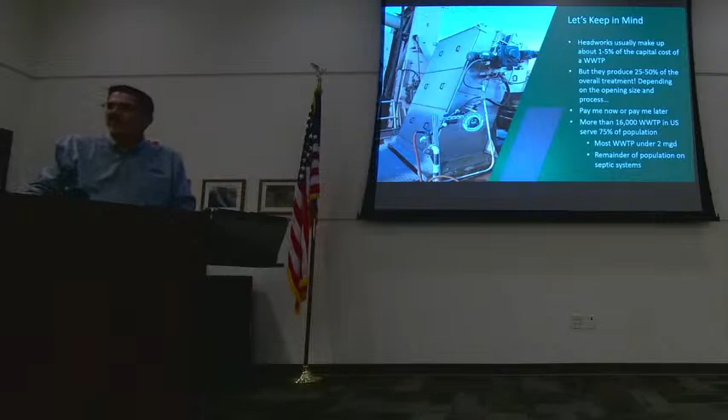So before we really get started, I want to give you a couple things to think about as we go through the presentation, and hopefully these insights will help you put into perspective the things that I'm going to talk about. So when we talk about new wastewater treatment plant projects or wastewater treatment plant upgrades, for example, the capital cost of headworks is between 1% and 5% of a typical budget.

But that headworks is really going to do more than between 25 and 50% of your treatment, depending on what the process is that you're using. And that's a lot.

And I like to say that headworks screening is a pay me now or pay me later proposition. We can take the time and spend the money to take that trash out up front and do it right, or we can spend the next 20 years chasing the trash through the process, right? So that's really something that's important. It's worth spending the time on. So let's remember to keep these things in mind as we go through the rest of the presentation.

Now, when we talk about headworks or wastewater screens, what do we really mean? A screen is simply a barrier with a fixed opening, used to separate one thing from another. In our case, we're separating the liquids from solids, the liquid stuff from the chunky stuff.

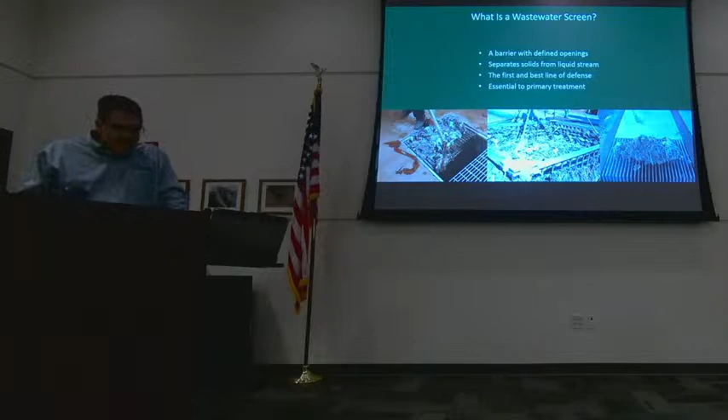Your headworks is the first and really perhaps the most important step in the wastewater treatment process. So great care should be taken when designing and selecting headworks equipment.

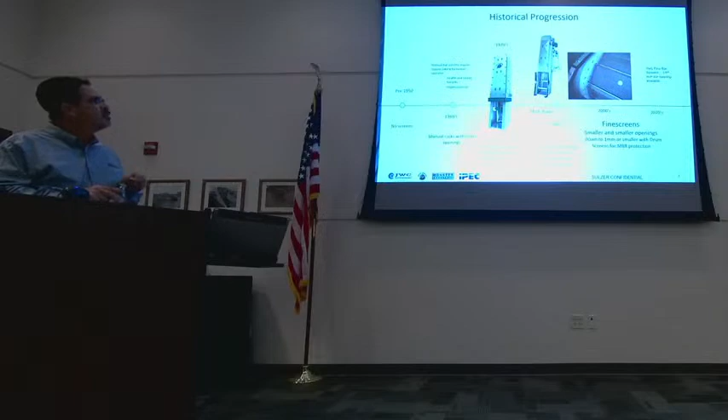Now, historically speaking, we've definitely come a long way. From the earliest days of modern wastewater treatment, there were no screens. Basically the treatment was settling, more settling, some more settling, and then maybe a little disinfection right along the way.

So what is the nature of the material that's being screened out or removed? We generally classify it into two categories: organic and inorganic solids. The organic solids are generally things that can be broken down and are usually helpful as food, for example, for microbes in a biological treatment process.

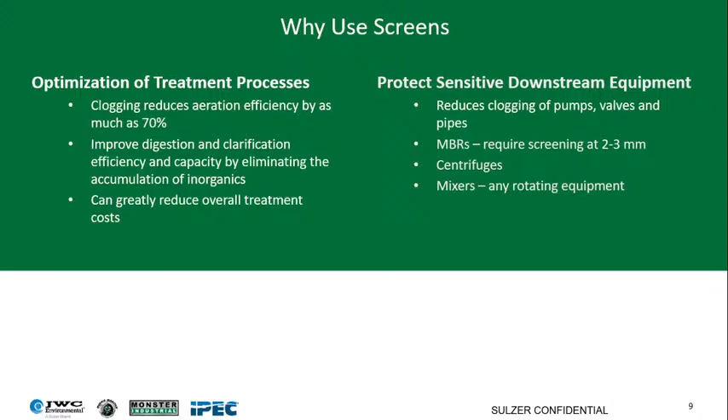Effective screening protects downstream equipment. This is probably the most obvious or visible advantage. We're talking about pumps, MBRs, centrifuges, mixers, any type of rotating equipment that comes into contact with the wastewater benefits from effective screening. We all know when a pump is clogged and has to be deragged, for example. That's a very obvious example.

But definitely the sexiest benefit is that effective headworks saves you money. And who doesn't like to save money? Headworks saves you money by reducing overall treatment cost, maintaining high efficiency and low maintenance costs. If that equipment is working well, we can spend a lot more time doing more productive things than worrying about deragging pumps, for example.

So effective headworks screening directly affects the bottom line. Just by reducing the time spent maintaining ragged-up equipment, that alone can justify the expense of better screens. But that's not all. Maintaining operational efficiency in aeration basins or digesters, for example, drives down the ultimate cost of treatment, so the cost per gallon of wastewater to treat goes down.

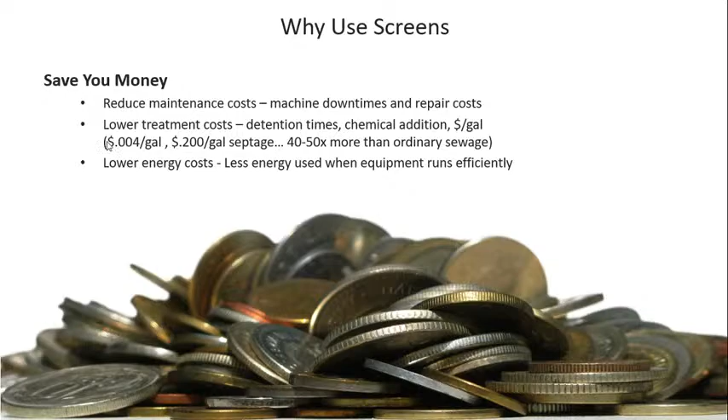Lastly, there's an important income stream that municipalities use around recycled biosolids—things like cogeneration, pelletizing, land application, and so on. These uses all require the final product, the dried sludge, to be very clean, otherwise it's unusable. So let's keep that in mind too.

Here's a quick look at what we mean by the results of poor headworks screening, especially as it relates to protecting downstream equipment. This is a problem a lot of you are familiar with: clogged up pumps, of every kind. This is a dirty job—we spend too much time and money dealing with it. And the problem isn't going away; it's probably getting worse, especially with the advent of flushable or non-flushable wipes.

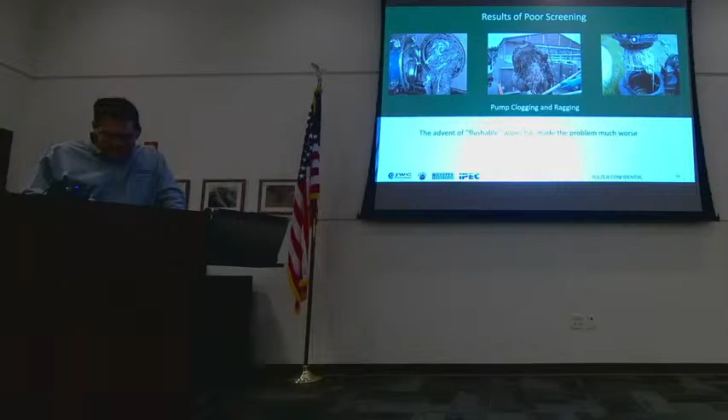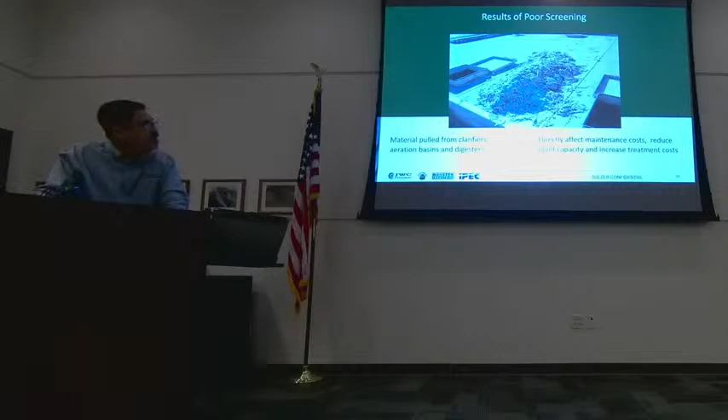Again, here we see a similar problem. Sitting on the deck are rags, or witch's hair, or many other names we call it, that's been removed from an aeration basin or an MBR chamber. If these came out of an MBR chamber, it's a very serious problem, because these rags hanging all over the membranes cause a lot of damage, and that issue can become very expensive in a short period of time.

Now that we've seen why it's important to screen, let's look at a few of the more common or important technologies available. Today we'll be looking at bar screens, perforated plate fine screens, band screens, and internally fed drums. But it's also important to note there are many other types as well.

Spiral screens, step screens—which are a type of bar screen—grab screens and trash racks for very large flows, for example in flood control, in-channel drum screens, semi-permanent baskets, element types, and there are even more types we just don't have time to talk about.

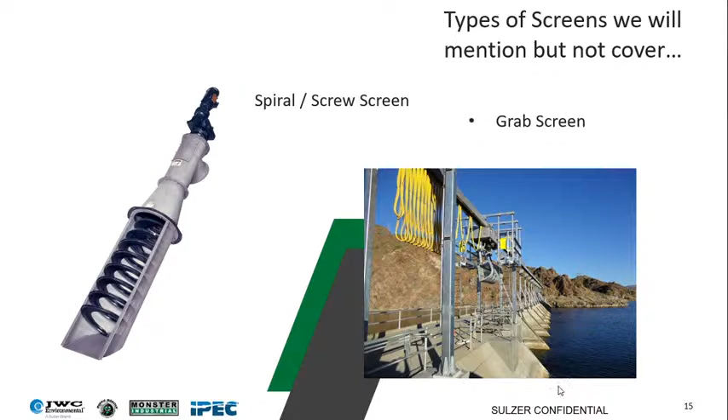Before we go on, I want to show you two different types of screens that I'll mention in passing but won't discuss much today, just so you have a frame of reference when you see them. On the left is a spiral or screw screen—many of you are familiar with this: a permanent semi-round basket, perforated plate cleaned with a spiral with a nylon brush on the edges. On the right is a grab screen, the Bosker type. We won't discuss these in detail today, but I wanted you to have that frame of reference.

Let's start with bar screens. Again, there are many types: climber screens, which have a single rake arm, and multiple rake screens that a lot of you are familiar with—these have multiple rakes on a continuous chain, cleaning the bar rack continuously as the chains rotate. Step screens are thin lamella plates alongside each other.

Trash racks have flexible rake assemblies for raw water. They can be quite large, but are mostly intended for raw water—you see these in flood control applications, for example. Catenary screens are a very early type of multi-rake design.

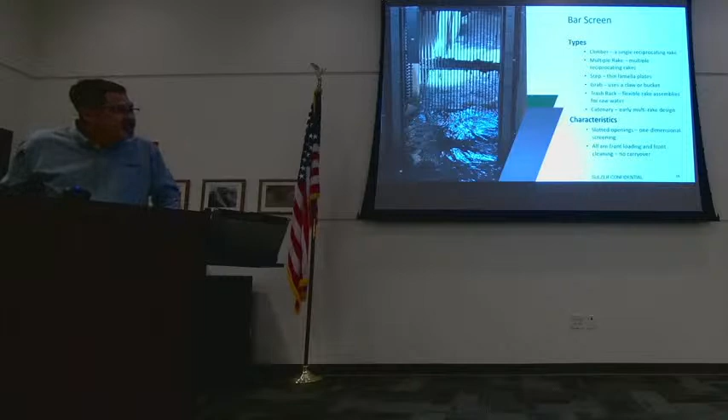These are all characterized by slotted openings—one-dimensional screening. That slotted opening is as deep as the water column. They're also all front loading and front cleaning, meaning there's no opportunity for screenings carryover. All of the trash is captured on the front of those bars and stays there—that's why it's front cleaning and front loading, with no carryover.

Now, bar screens are employed throughout the wastewater treatment system. You'll see them in collection systems, at pump stations, in the headworks of course, and they have industrial applications as well as in septage receiving.

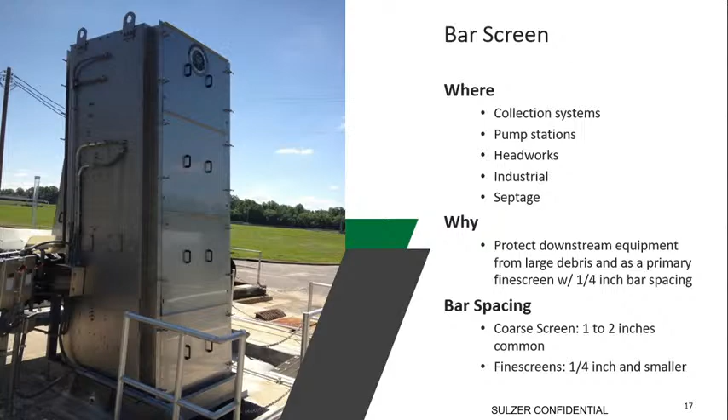Now, why is this piece of equipment helpful? It's mostly used to protect downstream equipment from large debris. This is a coarse screen. When used as a primary headworks screen, the bar spacing is typically 1/4 inch, and that's actually considered a fine screen today. But where you'll see it most often is with large bar spacing, greater than 1/4 inch, maybe 1/2 to 2 inches, in front of large pumps to protect those pumps from damage.

So as we go through the terminology, fine screens are typically today considered anything with a 1/4 inch opening or smaller.

Now this type of equipment does have a lot of benefits as well. It is by far the most common screen employed today. In every part of the country, it's the most ubiquitous headworks screen that we have. It's quick and easy to install, and relatively inexpensive compared to other technologies we'll talk about, and it's very versatile in that it can be fit into virtually any application.

Most all of these in-channel screens that we'll discuss are able to be delivered in sections, so that allows us to use low overhead space, etc.

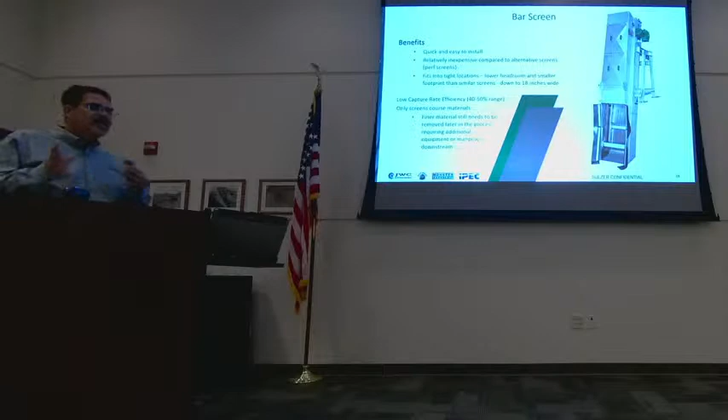Now the downside is that this equipment has very low capture rate efficiency. All the types of bar screens that I mentioned have capture rate efficiency in that 40 to 50% range. Now when I quote you capture rate efficiency numbers, we're talking about everything that comes into a headworks.

So now let's look at the next type. We'll talk about the perforated plate fine screen or mesh screens as well. There are a lot of different types. That spiral and screw screen I showed you a picture of, that's a perforated plate. It can be considered a fine screen with 1/4 inch perforated plate.

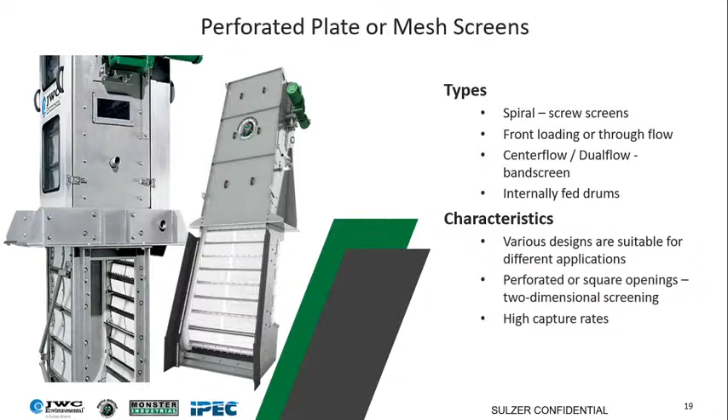There are front loading and through flow fine screens as well. There's the center flow and dual flow screens - the dual flow especially are used for raw water intake. These can be very large equipment, up to 100 MGD in a single unit.

And of course, internally fed drum screens also employ a perforated or mesh screening media. Now this type of equipment is characterized by high capture rate efficiency. Whereas the bar screens are low capture rate efficiency in that 40 to 50% range, the different designs of perforated and mesh screens can have capture rate efficiencies from 70 to 90% or more.

And that perforated or square opening allows us to screen in 2 dimensions. Whereas the bar screen is screening in 1 dimension, because we're using perforated plate or mesh, we're screening in 2 dimensions, and this is the reason we can get such high capture rate efficiencies.

Now, since I've told you about 1-dimensional and 2-dimensional screening, let me try to illustrate what we're talking about. On the left-hand side, you see a bar screen with a 1/4 inch opening - it's a single slot as deep as the water column. Why does it have such low capture rate efficiency? Well, you can imagine that if you're a credit card or a drinking straw or a piece of paper, you can squeeze in between those two bars and pass through into the wastewater treatment plant.

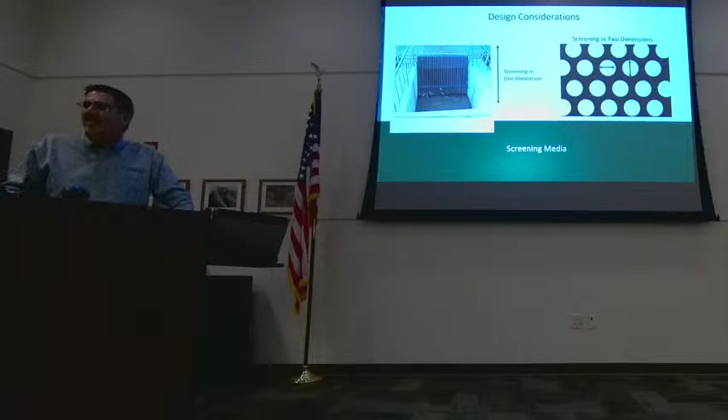There's also a difference between bypass and carryover. Since the capture rate efficiency is not 100%, there are things that are going to get through a screen. That is considered screenings bypass - it either circumvents the barrier or passes through the barrier in some way.

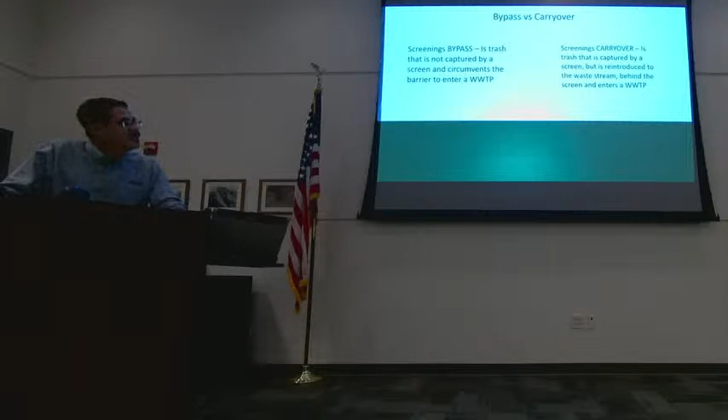Carryover is different. This is trash that is actually captured on the screen, but then reintroduced into the waste stream in some way. So on a bar screen, for example, we carry the trash up on the face of the screen, and then we move it over to the backside because we discharge the screenings on the backside. Now if we don't get all that trash off there effectively, it's going to drop into the waste stream behind the screen and enter the plant.

So that's called carryover, and we'll see that sometimes it's important or not important, depending on what the treatment process is. In a standard biological or aeration treatment, a little bit of trash maybe isn't so important. In an MBR or another fancy treatment process, a little bit of trash can do a lot of damage. So there's certain equipment that's appropriate for one application and not for another.

Do you have data here in Central Illinois on what type of equipment is in the downstream, or is it all over the place? We're getting a question here in the room. Yes, all over the place. On that basis, the frontline defense or headworks screen can be designed around what your downstream process is capable of handling.

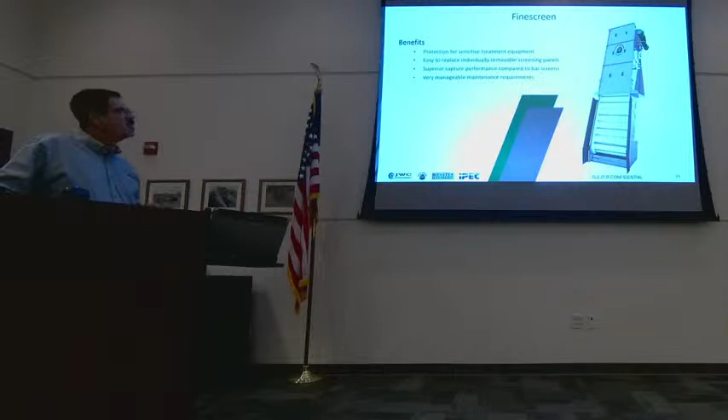We can use perforated plate on this type of equipment, down to 2 millimeter, even 1 millimeter - you'll see 1, 2, or 3 millimeter openings for very sensitive processes. A typical headworks fine screen will have 6 millimeter or 1/4 inch openings. We can do stainless steel or UHMW panels. It is front loading, but different from the bar screen, it is rear discharging. That's where the possibility for carryover exists, and for that reason this particular equipment is not recommended in front of an MBR.

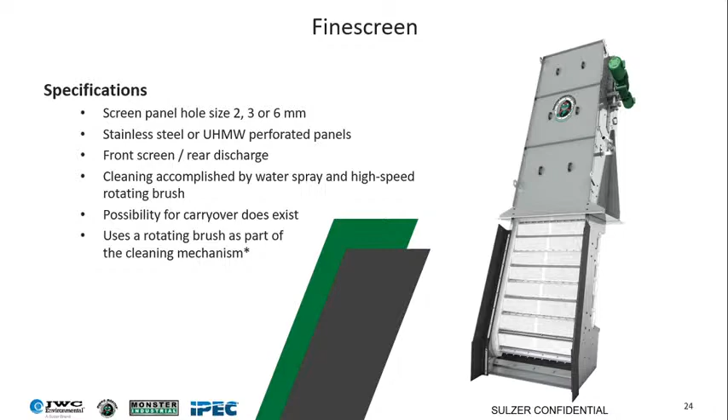We'll see why, or what's the difference between this one and a band screen, which is recommended in front of an MBR. And I told you it uses that brush as part of the cleaning mechanism - I have an asterisk there because the cleaning brush on this type of equipment is a point of contention. There are a lot of operators and owners for whom that brush is a problem. It does have to be maintained, replaced periodically, and part of maintaining the brush means cleaning it - and it is covered in poop. It's a dirty job, nobody wants to do it.

So there is an alternative. JWC does have a through-flow fine screen without a brush - we call it a brushless fine screen. Now because that brush is doing a lot of cleaning, we have to replace that cleaning with something else, and that something else is more water. So we add a second spray bar, we throw more water at it, at higher pressure if possible, but we remove the brush. So this option is not for everyone - you have to understand you're going to be consuming a whole lot more water, but on the other hand, you're getting rid of the brush. So that option does exist.

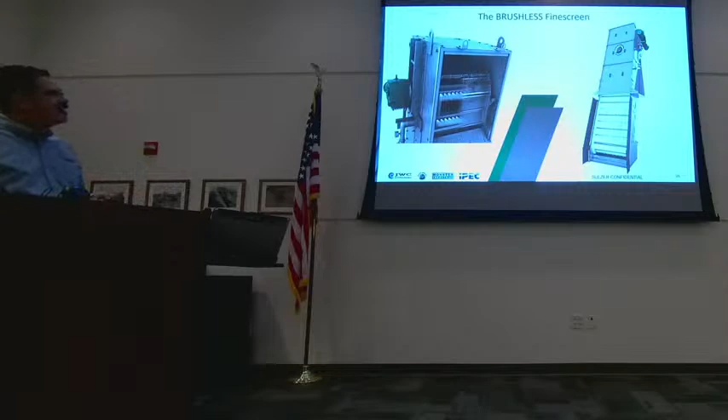Here we just see some nice installation photos. Similar to the bar screen, the through-flow fine screen is pretty versatile. We can make them as narrow as 18 inches, as tall as 50 feet, so they're quite versatile as well.

So what are those windows? Go back to the screen. Those handles you see, on the front, those are front covers. On the upper left you see the UHMW panels version, and on the upper right is the stainless steel panels version that I told you we can do either.

A good question there is, what's the difference? Well, stainless steel is obviously more robust than the UHMW. So if this is being employed as a primary headworks screen, you can expect sometimes to have large impacts, rocks or engine blocks, dead bodies, things like that. So the UHMW panel is a little bit less robust.

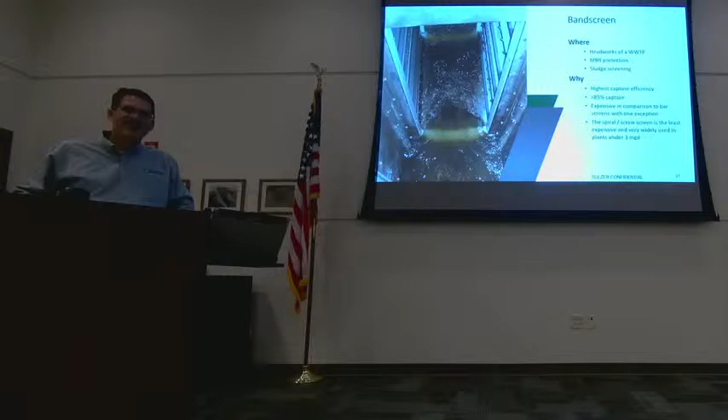And you talk to a maintenance guy, and he said, oh my God, I didn't even realize these things needed to be done. I wish I could record this. I honestly feel every time these guys come in, you better do all your recording so you can check the brushes, check everything. That's actual hands-on training with your maintenance guy, and that's priceless. How many people get that opportunity where a manufacturer comes in and rebuilds it?

You're paying 15, 20 grand. If you want to take full advantage of it, if I were head of the department, I'd put a drone or a recording up there, continuous recording. And if I want to stream it on Facebook, so be it. That's a great point, Ram. That's a really, really good point.

So oftentimes when we sell a new Headworks screen, we like to offer the owner a maintenance program. It can be as simple as 2 years or 3 years, where I'm going to come out twice a year and inspect the equipment.

And every single time, the biggest part of that is training. This is an investment, an insurance policy where we're going to do some continuous training for your operators. Twice a year we come out, hopefully there's nothing to do, but we'll show you how to maintain the brush. So it's interesting, when we were looking at the through-flow fine screen with the rotating brush on the back side, we'll get a call periodically saying, hey, that fine screen you showed me is a piece of crap, doesn't work.

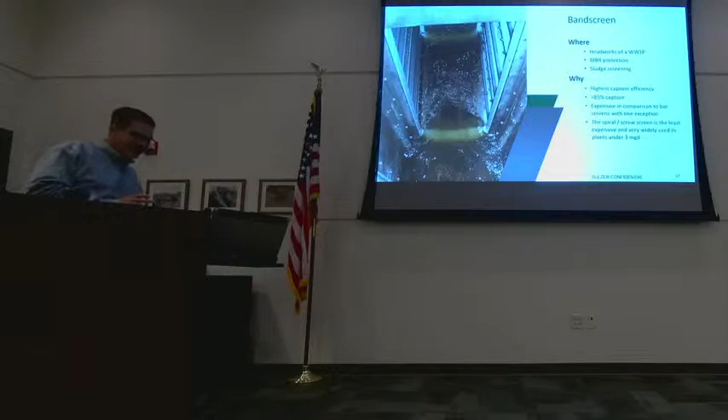So the band screen, again, is a fine screen turned on its side. Here, instead of the liquid impacting the screen on its face, it goes inside the machine, and then the trash is being collected on the inside. So this type of equipment is recommended in front of an MBR because there is no possibility for screenings carryover. All of the trash is collected on the inside of the machine, so we call that the dirty side of the panel. And the clean side of the panel is on the outside of the machine, and the two never meet.

So that's what, because of that, and because of the sealing methods that we use, this equipment has even higher capture rate efficiency than the through-flow fine screen, greater than 85%. So now we're really talking about making some impact. Now, it is a bit more expensive. So in terms of capital expenditure, you go bar screen, through-flow fine screen, band screen. Every time we talk about higher expense or higher capture rate efficiency, remember we're also talking about better performance. And we also see a little bit higher head loss again.

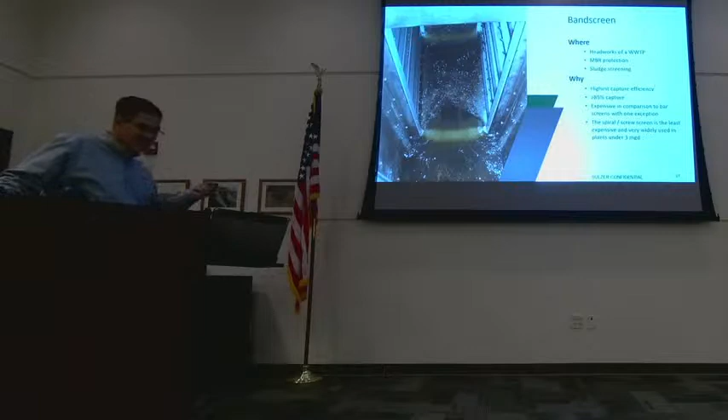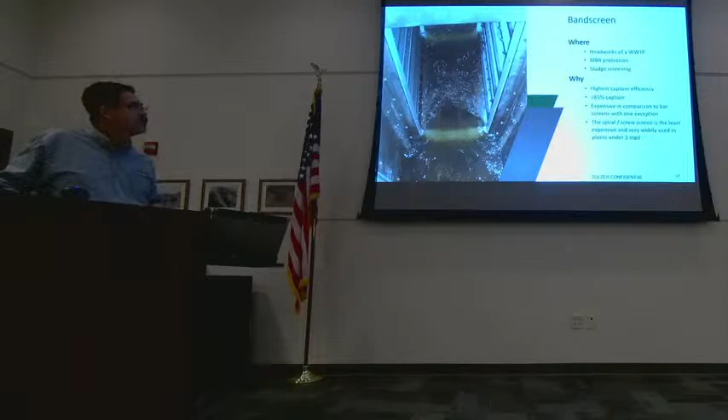So here on the left-hand side, now we can see what we were talking about before. It's easier to see how the water enters that screen, enters the throat of the screen, then makes hard right turns as it hits the back, and then is filtered through those panels on the inside. So this is the highest capture rate efficiency of any of the in-channel screens. All of the screens are fully enclosed to reduce odors. Similar to the through-flow fine screen, all of this band has individually replaceable panels.

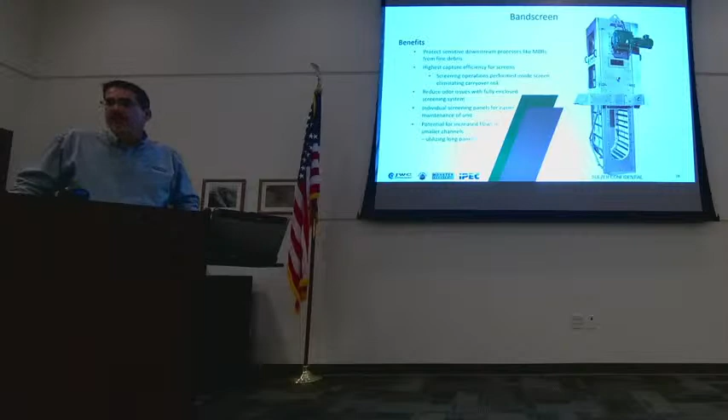Now, the most unique thing about the band screen is that you have the opportunity to have panels which are longer than the channel is wide. So a lot of times, clients will want to get more flow through their plant, but they will also want to screen it better. Clients are usually on a continuum with regard to screening. 30 years ago, they might not have had a screen at all, and they bought a bar screen with a 1/2-inch opening and were super happy with it. Oh my God, this is amazing, we didn't realize how much trash we could collect. And they had that screen for 15 years, and then suddenly they weren't happy with that anymore. So they went to a 1/4-inch opening.

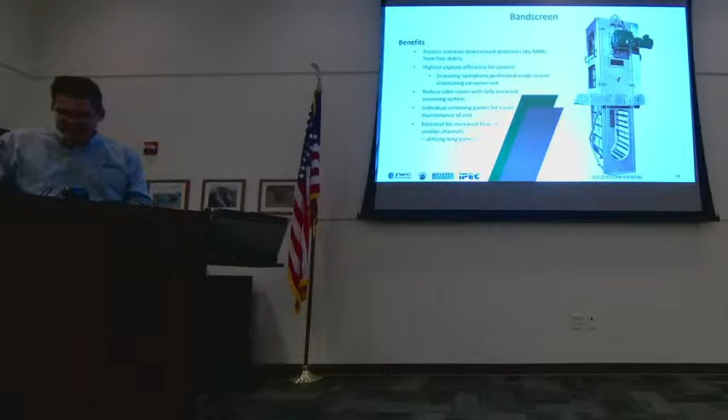And now 30 years down the line, as the client progresses on that continuum, his tolerance for trash keeps going down. We got to take out more and more until we get to the perforated plate, and then he wants to start putting more flow through it. Usually the answer is no, because we're limited to the width of the channel. But with a band screen, we can make the panels longer. We're not limited to the length of the panel by the width of the channel. Panels can be longer. So in a 4-foot channel, I can get a 6-foot panel, and I've got 2 of them, so I'm adding a lot more open area to that space. And this is your best chance for getting more flow through an existing channel is in a band screen. But remember, it's expensive. It's the most expensive of the in-channel types.

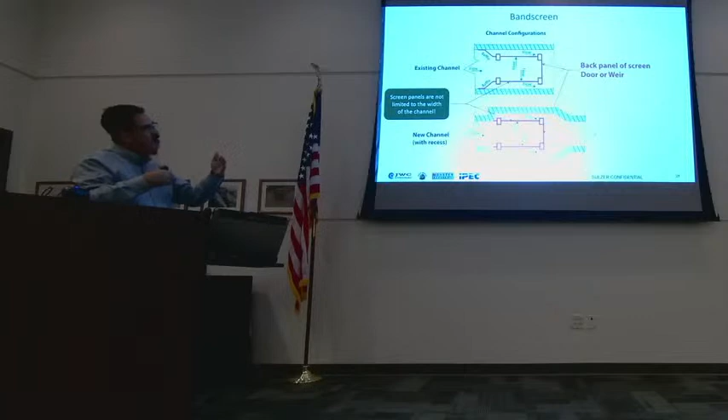So this kind of shows you what I'm talking about. The red lines are where the band screen would be installed. On the top part there, we can see an existing channel. I can make those panels longer, but you see the arrows that show you how the flow goes in, goes out the sides, and then around the back. When we have new construction, we can recess that channel, we can bump it out a little bit. So it's a narrow approach, a bump out for where the screen sits, and then narrow again in the back.

So as I told you, this is recommended in front of MBRs. We can go down to 1 millimeter to 6 millimeter perforations. Also UHMW or stainless steel. No possibility of carryover with this equipment. Very high capture rate efficiency compared to other in-channel screens.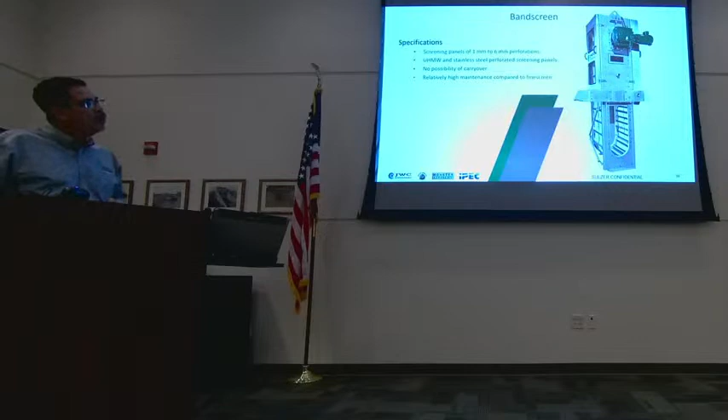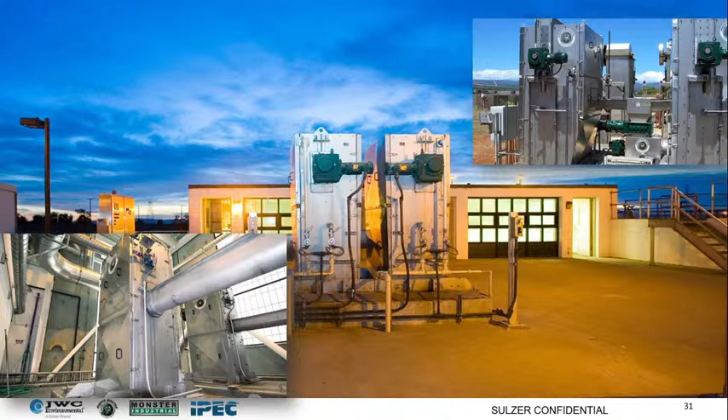Now sometimes I'm asked, well, how does the trash get out of there? Because the trash is collected on the inside. Over there on the right-hand side of that picture, you see there's a square opening under the drive system, so that's the trough where that trash is collected. So as the trash is collected on the inside of the band, it's carried to the top of the screen where we wash it, and it falls into that trough, and then that trough brings it out of the machine. We can do it in different ways, as a sluice way, or a shaftless conveyor, or even a washer compactor, so we can even put a washer compactor inside of the head of the screen to capture those solids as well.

So the last ultrafine or perforated or mesh screen we're going to discuss today is the internally fed drum. These are employed in primary headworks, very good for MBR protection for the same reasons as the band screen.

As a sludge screen, septage receiving, in all kinds of industrial applications, and a very wide range of flows. The largest internally fed drum screen we manufacture can manage 12 to 14 MGD in a single unit. Very large drums, there's a 60-inch diameter drum by 12 feet long. So a large drum.

Definitely by far the highest capture rate efficiency of any of the equipment we've discussed so far today, 90% or greater. The reason for that is there's no sealing system involved in a drum screen. Everything that enters a drum has to be screened or come out the other end. There's no place for it to go. So the capture rate efficiency is very high, because there's no sealing systems to maintain.

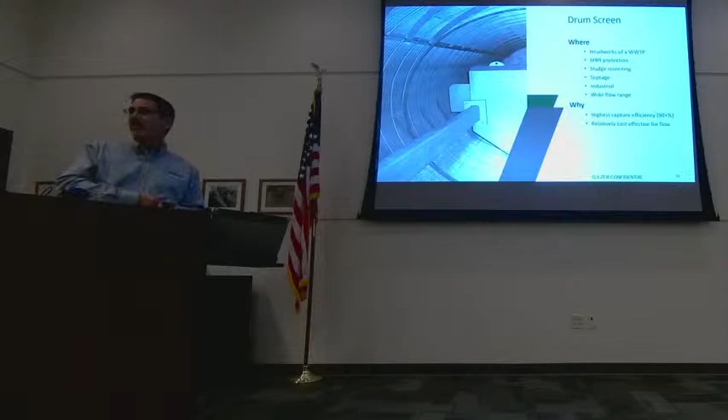Very bad also, right? So as a designer, an operator or a consultant, you have to decide what's preferable. Do I want to risk an overflow? Do I mitigate it by building containment? Or do I want to risk potentially fouling a membrane unless these seals are properly maintained? So we talk about the give and take of that kind of design consideration.

So here you go, between 12 and 14 MGD in a single unit, but they can also get kind of small, we'll make as small as an 18-inch diameter drum. It does require pumped flow, although it's also possible to feed them by gravity. But typically you'll see these in a pumped flow application, elevated headworks, or in an industrial application.

Now you say, well, that sounds great, much better than a band screen, and it can be. But the capital expenditure, there's a break-even point. Very, very large screens, very, very large applications.

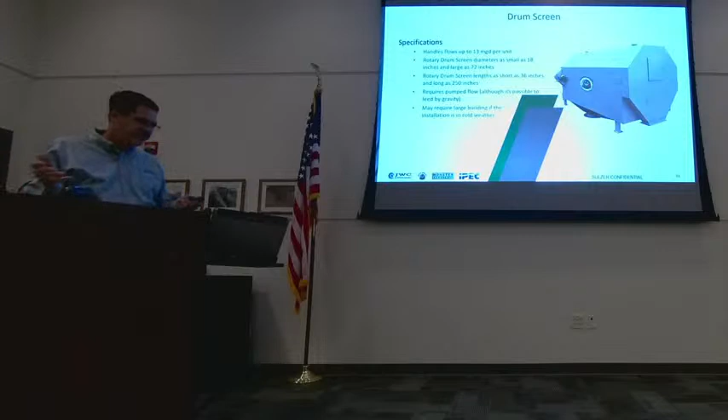You imagine some of the wastewater treatment plants in the city of Chicago, a 300 million gallon a day wastewater treatment plant. If we were going to do it with drum screens, let's say 10 average, that's 10 for 100, 200 is 20, 300 is 30 screens. That's untenable, and especially in Chicago they would have to be inside a building. So the infrastructure becomes too great.

So it just becomes cost effective, you must use channel screens. There's kind of a break-even point in that perspective. When you get very, very large applications, it has to go in channel. Smaller applications, if it's pump flow especially, drums are the way to go.

So super high capture rate efficiency, you can have mesh lined drums that are used for thickening sludge, where we're talking about thousandths of an inch. They're designed for pump flow, fully enclosed screens, again no carryover, so there's a lot of pluses. I can show, on the way here talking with Ram, a lot of the industrial applications.

So these screens are employed in all kinds of applications. We see screening algae, whole chickens, feathers, and all kinds of stuff, fish guts. It's an amazing array of applications for the drums in industrial applications.

Now, here quickly, if you hadn't been exposed to drum screens before in the past, exactly how does that operate.

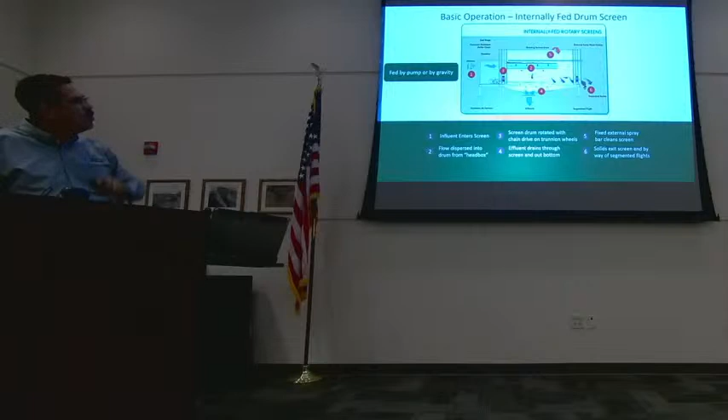The water enters the drum from the left-hand side. It might be difficult to read there, but that influent enters the screen at the red circle number 1, and then it spills out onto the drum over the head box there, and then the effluent, screened effluent drains out the bottom, and the solids that are collected on the drum are augured out to the discharge end down there at the red ball number 6.

How many application between in a wastewater treatment? You can repeat the question. How many application in a wastewater treatment plant do you see with the drum screen versus the standard channel?

So the question was, how often do you see drum screens applied versus channel screens? Really, it's kind of regionally dependent. In areas where there is very flat areas, like Florida or Texas, places like that, and deserts that are not mountainous, then you'll see more drum screens, because everything's pumped. Everything has to be pumped because there's no gradient to flow by gravity. So those places you'll see more, higher percentage.

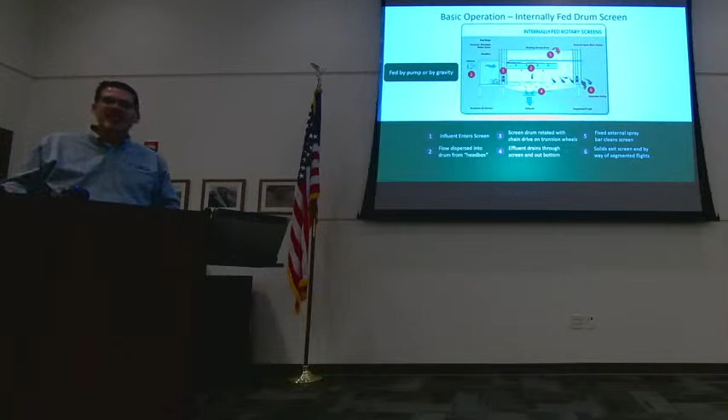But even in those areas, you still see more channel screens than you do drums. I think it's just because the consultants are more used to designing in-channel or channels leading into a wastewater treatment plant than they are doing the other way. So I think it's kind of still, I'm not going to say it's emerging technology because it's not. It's just that consultants tend to do what they know, and what they know is to deliver wastewater in open channels to a wastewater treatment plant.

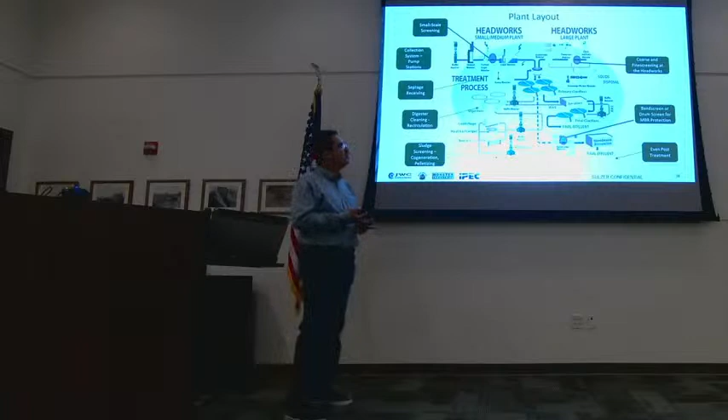So we talked about small scale screening, with those screw screens and auger screens, large headworks with the in-channel screens as well as drums. But then we talked about pump stations and collection systems. We talked briefly, we mentioned septage receiving stations. We mentioned sludge screening. So when you're going to have cogeneration or pelletizing or things like that, that sludge has to be really clean. So you'll see rescreening sludge.

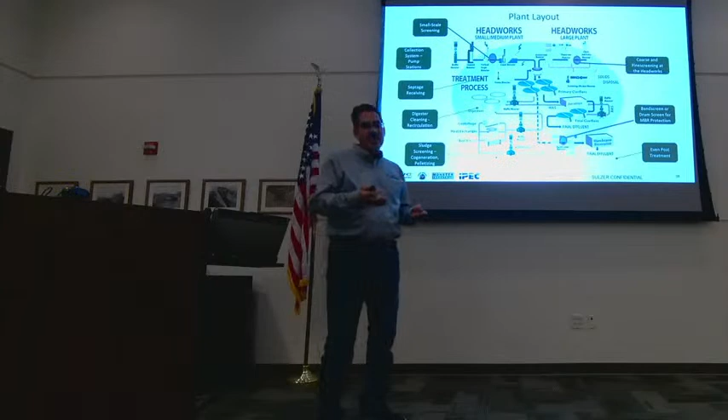Even at the end of the treatment, so in front of MBRs, and even at post-treatment. In a lot of industrial applications, you'll see that there is a bit of something that doesn't come out, even after the whole treatment process. These are like little plastic beads or something that still has to be screened, so you have to screen again to get those last bits out.

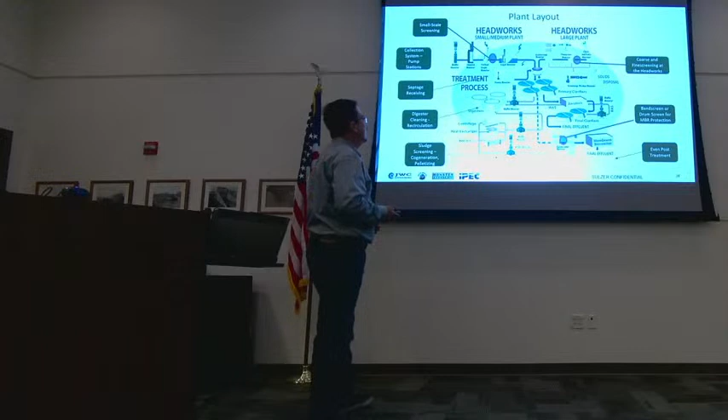So screens are being employed all over the place. They're kind of like fairies or something—they're everywhere, you just don't see them.

So now we've seen why it's important to screen, and we've talked about all the different technologies. And so now it says, all right, well, then what's the right screen for me? Well, it depends on what your priorities are. Every client and every end user has different goals. You have to talk about, all right, well, what are my priorities? What's the driving factor in this decision?

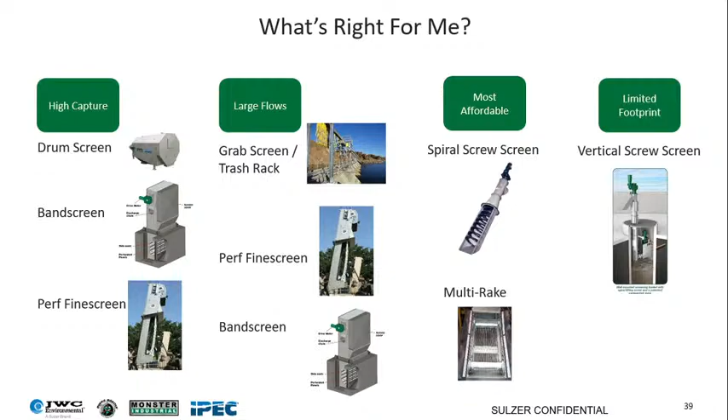So if high capture rate is important to you, then we're going to talk about drum screens, band screens, or fine screens. If you have very large flows, we might talk about grab screens or band screens or even the through flow perf screens. If you're looking for small flows or very affordable, then spiral screens and multi-rakes. And finally, if footprint is a concern and you don't have a very big footprint, then a vertical screw screen might work—especially in wet wells and manholes, for example, where the only thing that could possibly go in there is a vertical screw screen. I guess I need to add that to that second slide, because here I'm talking about vertical screw screens and I didn't introduce you to it, so I'll change that. So it depends on what your priorities are.

So if you're interested in high capture rate efficiency, we've got to talk about the opening size. Where are you on that continuum of screening right now? If you're in a plant that's never had a screen before, you're going to be super happy with a 1/2-inch bar screen. But if you've had a 1/4-inch bar screen for 20 years, now you're definitely going perforated plate, because you want better capture rate efficiency.

What are the hydraulic considerations? At your peak flows, are you already reaching near the top of the channel with your 1/4-inch bar screen? If the answer is yes, and you say, I need a 1/4-inch perforation, I want to give it to you, but it has higher head loss. If you're already close to the top of the channel today, you're definitely going to be spilling out. So we have to do something else. You can have it, but we need to build you a bypass, or we need to do something to help you so you can screen it, but in a storm event, you're going to have to bypass. So okay, we can do that. That's how we go through the design process.

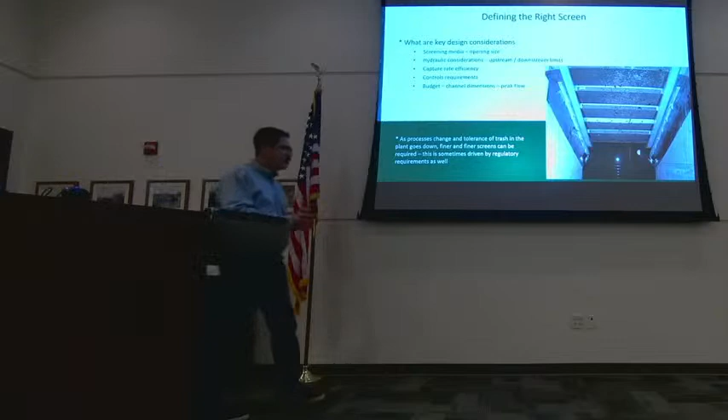There at the bottom, when you talk about that continuum, as the processes change and as the client's tolerance for trash goes down, then we need to move to finer and finer screening. But that can also be regulatory, right? So regulations can drive us to finer and finer screening.

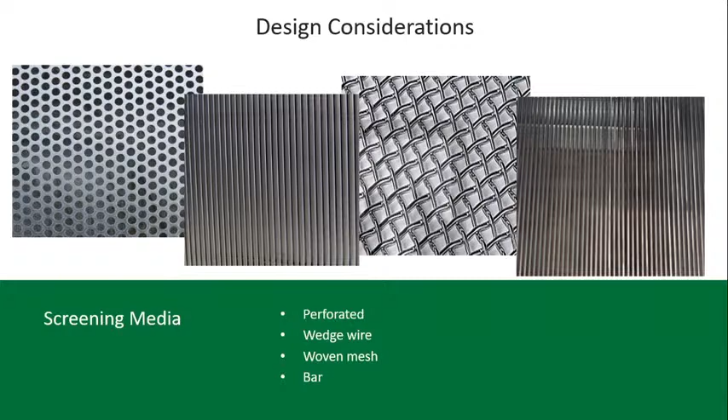So what are, when we talk about design considerations, the first one we discussed is what's the screening media. So these are all the things that we've talked about today. We've got way down there on the right-hand side, vertical bars and perforated plate, and then kind of in the middle that we haven't talked about too much, we've got wedge wire and wire mesh. So usually you'll see wedge wire and wire mesh on internally fed drums, for different industrial applications, or for really, really fine sludge screening, for example, or thickening.

But all of those drive the capture rate efficiency. When we talk about open area, so when we talk about 1, 2, 3, 6, or 10 millimeter holes, number one, anytime that the open area or the size of the opening goes down, head loss is going to increase. Now, while your capture rate efficiency goes up, cost and head loss go up as well.

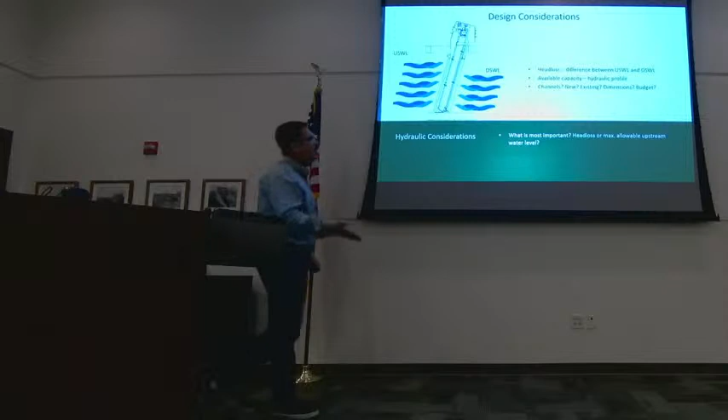Now, as it relates to headworks and wastewater screens, what is head loss? A lot of folks are familiar with pumps and what's the head loss of a pump and what that means, what that feels like. So for a screen, what does it mean? If we think about the flow passing through a screen going from left to right, we're putting a barrier in that flow. You have a water level upstream, the upstream water level. Now as it passes through the screen, it goes down, and that's the downstream water level. So for a screen, the head loss is simply the difference between the level upstream and the level downstream.

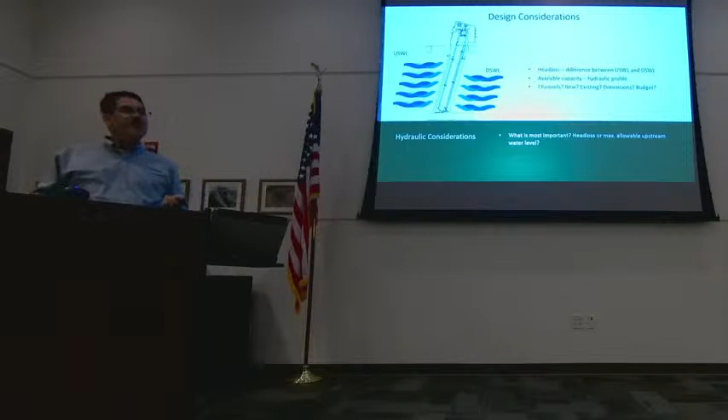Simple as that. Now, that upstream level, when we talk about available capacity or the hydraulic profile, that upstream water level may be limited. The most basic limit is the depth of the channel. We have to keep that upstream water level elevation lower than the top elevation of the channel. Otherwise, it goes out on the floor. We don't want that.

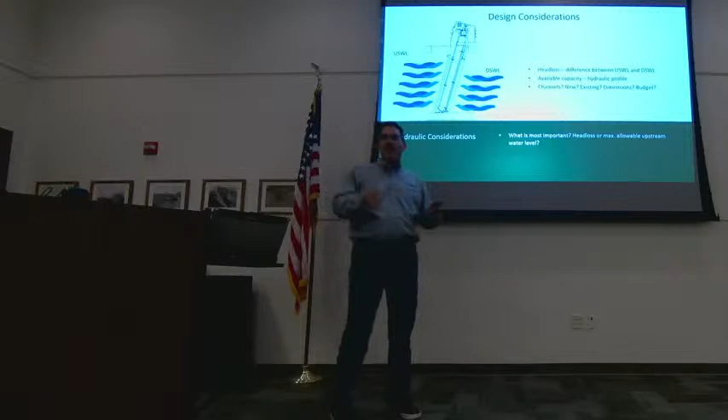But there could be other things, right? There could be an upstream water elevation that's known to cause issues in the collection system. So if the pipe that's coming into the headworks, it doesn't matter what size it is, an 18-inch pipe, but we know that when it runs deeper than 12 inches, Mrs. Smith's basement floods. So we don't want that either. So if there's upstream limitations, we need to know that. And obviously, are the channels new or existing? Is there a budget, etc.?

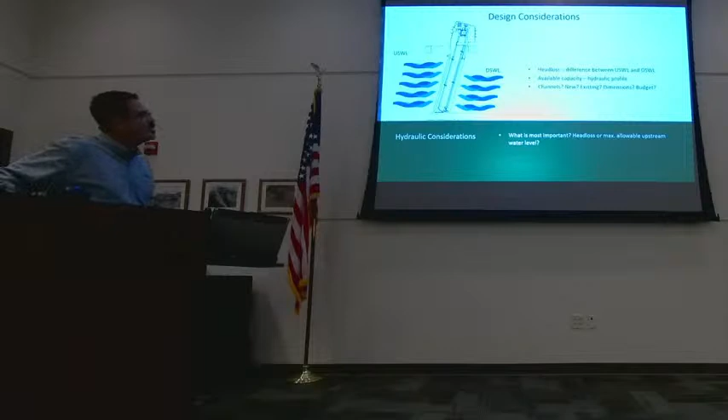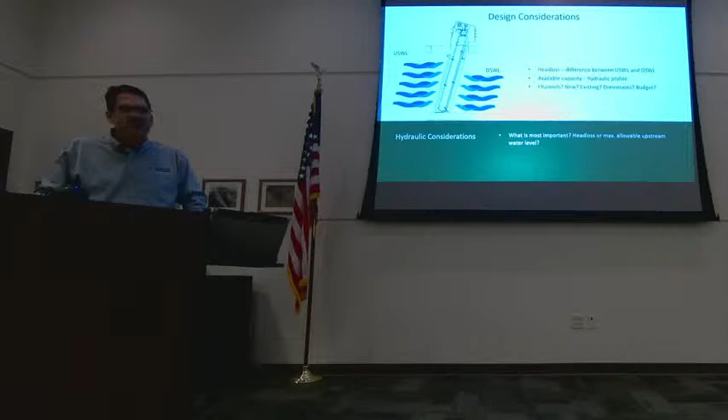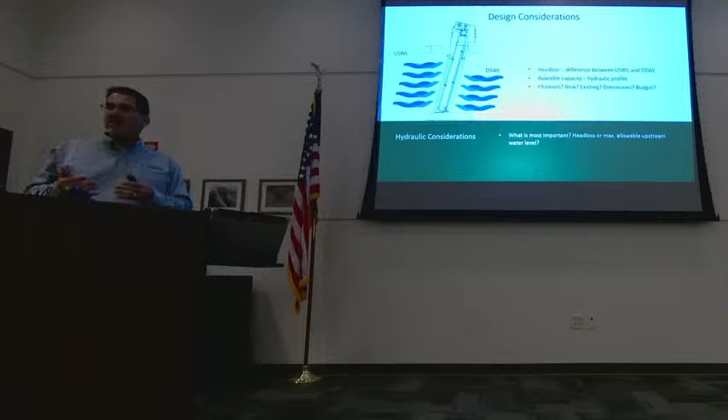So that's why I ask, what's really more important? Is the head loss more important, or is that upstream limitation more important? There's a lot of times when consultants or even end users, like any manufacturer will come to the end user and say, hey, we've designed your system, and we want to set the maximum head loss as 2 inches. And I'm like, okay, but you've got 12 feet of freeboard, the channels are really deep. It's not so important that the head loss only be 2 inches in that case. It could be 10 inches and you don't care because you have a lot of hydraulic capacity. So when you have that much capacity, then you can be more selective on what equipment you choose because you have that freedom.

Now this is talking about that hydraulic profile. Usually a consultant will develop a hydraulic profile, and if you consider this a wastewater treatment plant, he'll start at the outfall. You see a water level at the outfall, 121.2 feet. As we work our way back to the headworks, it gets higher. Aeration basin's 122. This PST is 125, and the grit chamber is 127. He says, oh, but then there's a pump in there. So actually from the grit chamber there's 128. The headworks is actually lower, it's like 120, but there's a pump.

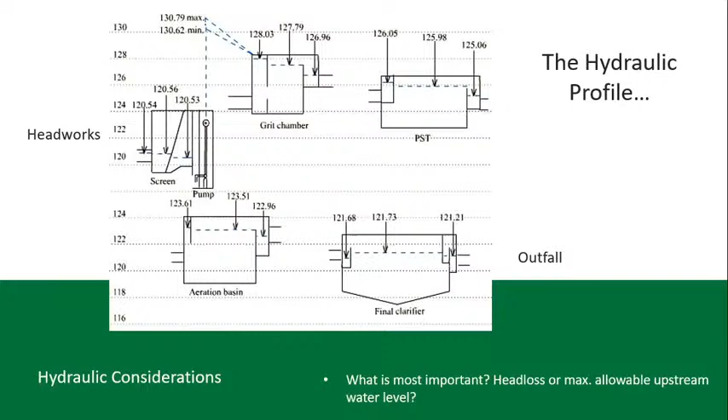So now we talk about that pipe at elevation 120 that we were talking about. Maybe that 120.5, that's the elevation where Mrs. Smith's basement floods, right? And we want to stay below that.

So now this is where we're getting into the nitty-gritty of a design, right? But that's the kind of information that as a manufacturer I need to know. What's the hydraulic profile? What are the limitations? What's the peak flow? What are the elevations we're talking about? And again, what's more important - is the head loss really more important, or is that upstream elevation the most important? For me, I always feel like the upstream elevation is most important.

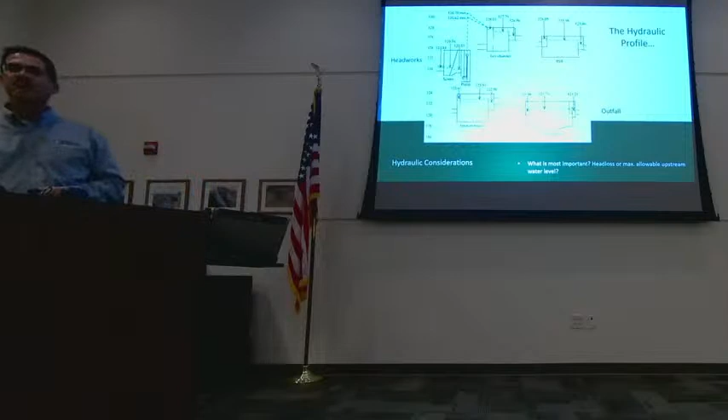So if one manufacturer says, no, I can do it with 2 inches of head loss, I'm like, okay, I'm doing it with 2.5 inches, but my upstream water level is actually lower than yours, for example. So what's really more important, the head loss or the upstream level? To my view, as long as there's no upstream obstruction, that upstream level is always more important than necessarily the ultimate head loss of the equipment.

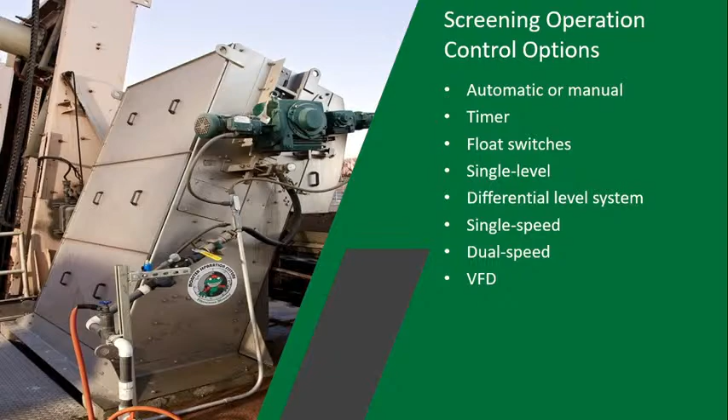Screens can be controlled in any myriad of ways - manually, with timers, float switches, single level, differential level, single speed, dual speed with VFDs. So really, when it comes to controls, the sky's the limit. And this is also kind of a continuum for different clients - some don't have fancy SCADA, or some clients have very fancy SCADA.

Honestly, today, the PLCs that we use to run a bar screen are hundreds of times more powerful than the computers that we send men to the moon with. It's really overkill. But I never take exception to any controls - a client always tells us what he needs. But honestly, if there is no specification, a smart relay has more than enough computing power to run a bar screen in any number of ways that you want. So you can spend really as much or as little money on controls as you need to.

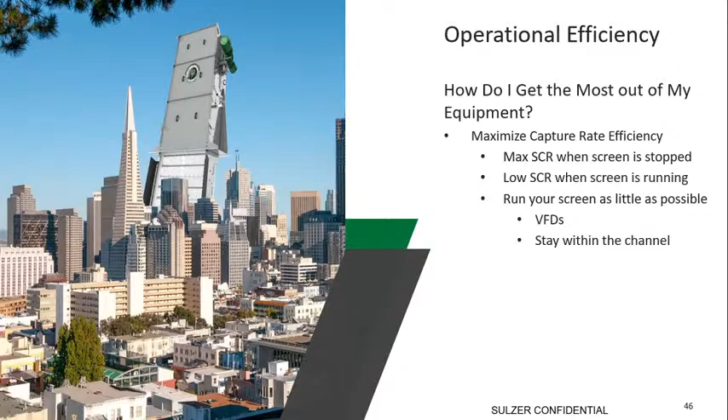And that's what I was telling you - do you need this level of control? It just gets more complicated, right? Sometimes we'll go to start up equipment and the operators don't want to touch it. They say, no, we're not going to touch it, you set that up, never going inside that box. Well, then it's too complicated. It has to be only as complex so that the operators are willing to work on it. If it's too complex to work on, then it's too complex for you.

Now, we're getting close to the end of the story. Earlier I told you that operational efficiency is one of the most important things that fine screening or efficient screening can help you with. So how do I get the most out of my equipment? I want to maximize the capture rate efficiency.

Now, I'm going to tell you a secret. Any screen, every screen, doesn't matter what kind it is, has a maximum capture rate efficiency when it's stopped.

Maximum capture rate efficiency happens when the screen is stopped, and lowest capture rate efficiency happens when it's running. It makes sense, because what happens when your screen stops running? Water keeps coming, it never stops. So trash builds up on the face of the screen and water level rises. That's 100% capture rate efficiency, nothing gets by, not even water. It's amazing, but it spills out onto the floor, and that's bad, EPA comes, we don't want that.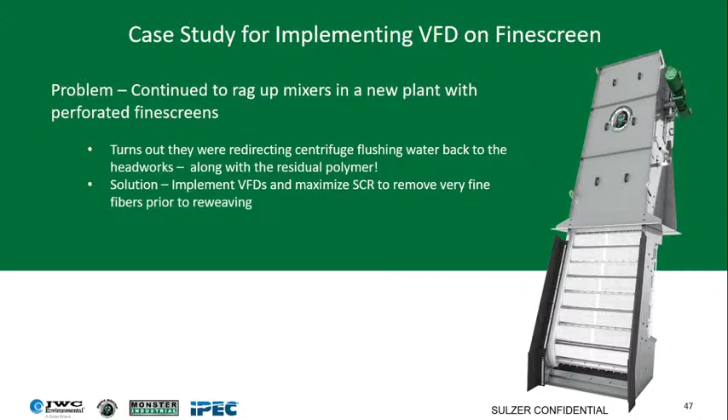This was a problem I was presented with a long time ago. A client had a brand new wastewater treatment plant with aeration raceways, paddle mixers inside, and two brand new quarter-inch through-flow fine screens like the one on the right. When the plant started up, they were deragging mixers every week, and they figured, well there's trash in the system, in a couple weeks it'll all be gone and work its way out.

But it didn't. So they called me and said, hey Zeus, the screens don't work, we're still deragging mixers every week. I said okay, we'll go down there and see what we can see on the mixers. What's on the mixers is horrifying. It's this witch's hair, like those giant rag balls I showed you before. I said, alright, well this is bad.

So we go and stand behind the screen. You've never seen like five guys standing behind a screen staring into the poop flow, just looking. We can't see anything, there's nothing getting past the screen. So alright, well, something's there.

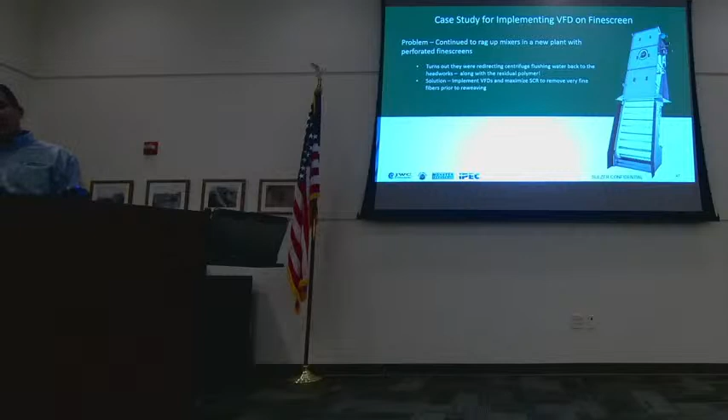So then we finally built a screen. We went to Home Depot or whatever, got some window screens, and made a basket. Stuck the basket behind the screen, and again, that's not what we found. What we captured, I call it applesauce. It's just like goo, and it's got really fine fibers in it, hairs, bits of paper. It's really fine stuff.

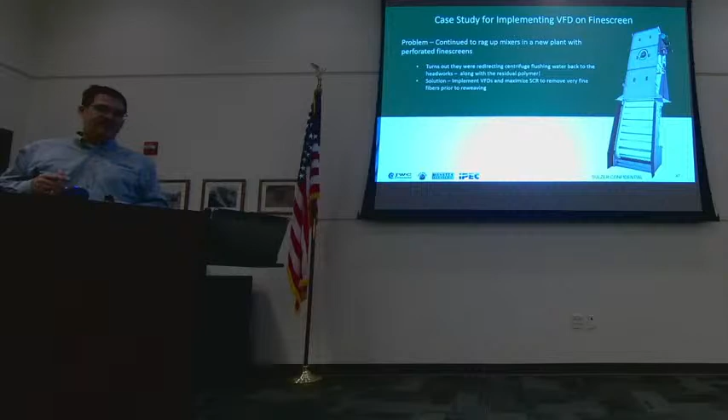But once that gets into the wastewater, it reweaves. It's like transformers, right? They're separated out there, and then when they come through the screen, boom, back together. And that's what they do.

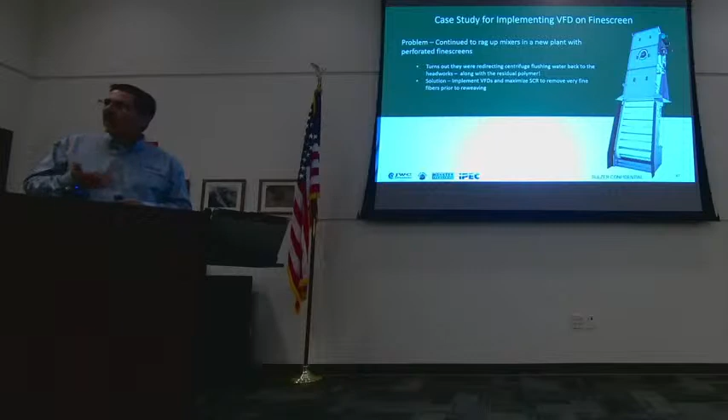So now, the only way was we employed the VFD method. If we can only run the screen as little as possible, build up that mat, we can capture things much smaller than the opening size. So we employed that method on the fine screen, and sure enough, immediately you could see the goo coming out on the face of the screen. I said, alright, this is good, it's working. I expected they would still have to derag some mixers, but maybe not once a week, maybe once a month or every six weeks. But the problem went away completely.

So I was very pleased with the result, obviously. I know this works. This is how sometimes I'll tell clients who want 2 millimeter screening, look, you don't need 2 millimeter screening, your process doesn't require it. I can get you really good capture rate efficiency with a 6 millimeter screen, but we're going to run it like this.

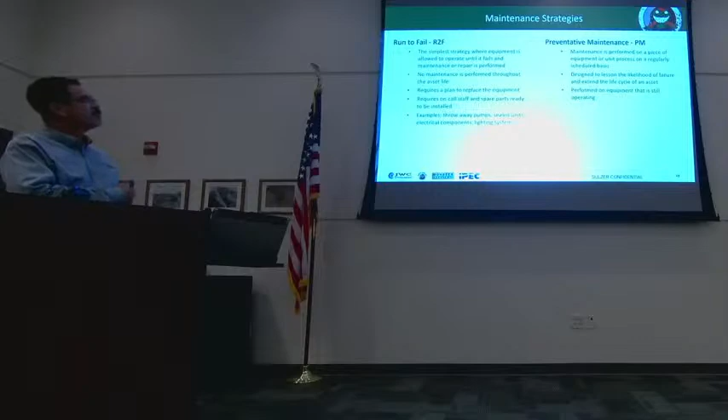So a little bit about maintenance. What are maintenance strategies? There are kind of three maintenance strategies that are predominant in the industry. The first one is run to fail, and that's exactly what it sounds like. We put the equipment in and we just let it run, turn the power on and walk away. There are some instances where that is appropriate, so a lot of electronic equipment, for example anything that's permanently sealed units not intended for us to work on, there is no maintenance to be done, it's maintenance free.

Also things like throwaway pumps or lighting systems, those are things we run to fail. A light bulb, for example, we don't maintain light bulbs, we plug them in, turn it on, and when it goes out, we replace it. That's it. Now, that is not appropriate for your wastewater treatment equipment, not even grinders. Some of our grinders that we have with clients that... I'll take that back.

Because there are some applications that are so treacherous and so difficult that that's the only thing they can do. They put grinders in, they don't maintain them, or they're making so much money - it's like a gold mine, right? Making so much money that it's not worth the time for them to maintain the grinder. They just put it in, and when it stops, they pull it out and put it in another one. But for your wastewater treatment screens, that's not a good idea.

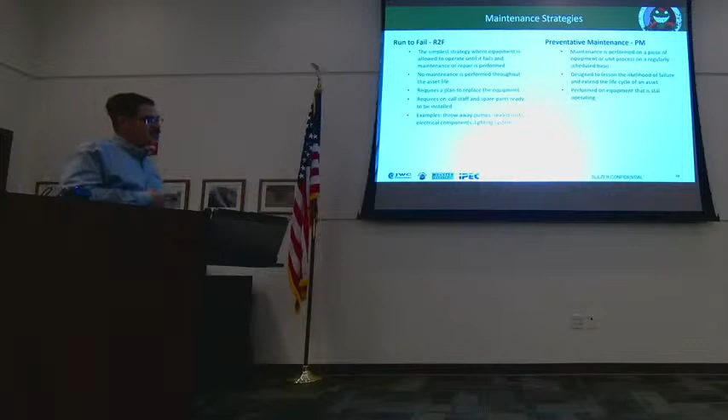There's still going to be a failure. You just don't know when. So you can do all of the right maintenance, everything that's recommended, and lo and behold, you still come in one day and the chain's broken or something's gone wrong, and you say, I've done everything I'm supposed to do and the thing still failed. But that's just the nature of the beast, because you couldn't predict when it was going to fail.

So that's the last strategy, right - predictive maintenance. What if there was a way - and Ram has a magic box over there in front of him - what if there was a way? This is a perfect slide, continuing for the next. What if there was a way to know when the thing was going to fail? That requires us to collect a lot of information, a lot of data, right?

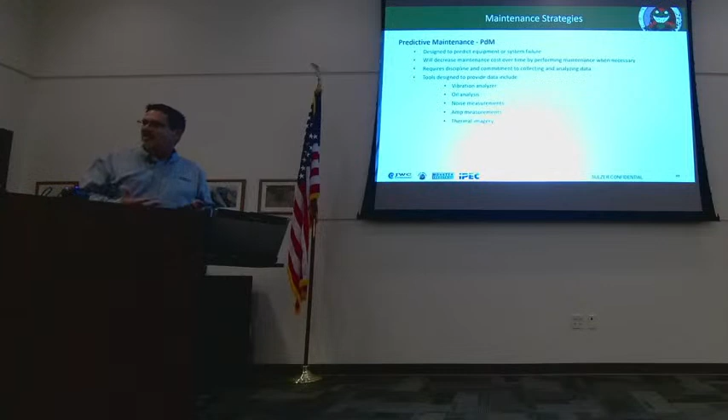Because there are guys - like I've gone through different plants and there's all the noises. Remember, I told you the story about the cleaning brush on the fine screen? That's a noise, right? As soon as I knew that the noise was wrong, I knew something was wrong before I even saw it. So a lot of guys know that about their equipment. They ask, what does it sound like? What's it supposed to sound like? And they'll come through and say, do you hear that? I'm like, yeah, what's that? He says, that's bad, right? So he knows something's wrong, and he even knows exactly what it is because he's intimate with these machines. So he's basically a predictive maintenance computer, because he knows by the sounds.

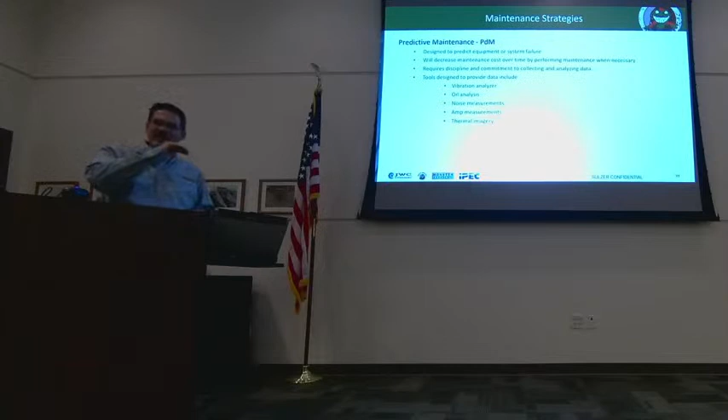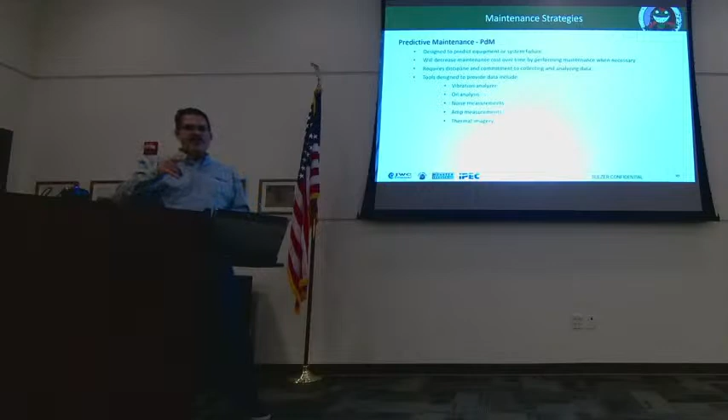So we collect vibration analysis, oil analysis, noise measurements, amp readings, thermal imagery, and we put it into an algorithm, and it tells us, as this value changes, when it starts to go down, stop the machine, change those bearings, put the machine back online. Because if we let the bearing fail, it costs me $10,000 an hour when this machine's not running. So if I can shut it down for 1 hour, fix the bearing before it fails, and get it back online, that's way better than letting the machine fail, tripping an alarm, calling somebody, finding out the bearings are out of stock - meanwhile it's 2 or 3 days instead of 2 or 3 hours. Right? So that's the idea.

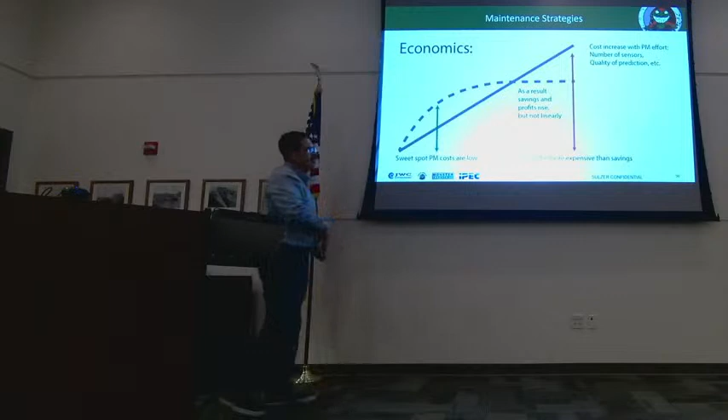Now, it's hard because you have to collect a lot of information and then you have to process the information. So you can spend a lot of money collecting that kind of information, and at some point the law of diminishing returns takes effect, where we're spending so much time and money collecting information that we're not getting any better. So you want to find that sweet spot where we're spending just enough time and money collecting data that all of our equipment is working, and we're not so far down that predictive maintenance becomes more expensive than the money we're saving.

So I'll just leave you with that, and then next time we come, Ram's going to talk to you about that magic box that he's got on his desk over there.

So this is one last thing, all right? As a capital equipment manufacturer, we were talking about equipment failure. I'm here to tell you one thing: as operators and maintenance people, you've been right all along. It's true.

Equipment manufacturers design equipment to fail at the most inopportune times possible, on nights and weekends, on your daughter's birthday. That's the time you can be sure equipment's going to fail. But I'm here to help you.

I can tell you at least when to expect a failure by answering one simple question. Does anybody know when the national peak flow occurs at our wastewater treatment plants? There's one time throughout the year when, as a nation, we have the national peak flow. That's at the Super Bowl halftime. So we're flushing toilets all over the country at the same time. That's the one thing I can guarantee you. At halftime of the Super Bowl, just turn the lights off and go home, because something's going to go wrong.

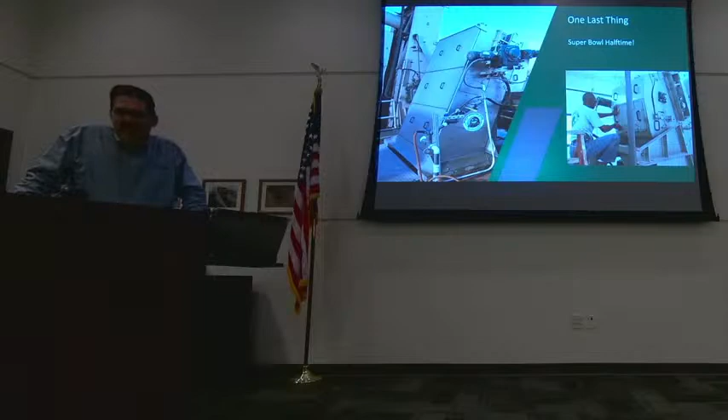I'll conclude with that video we're talking about. Sounds good, I don't see any questions online. If you want to go ahead and ask questions, go ahead. If there are no questions online, then Ram's going to come up and close things out. Ram, would you like me to show the video first? No, let me talk first, close this thing, give them the takeaways, and then show the video. Okay. Thank you very much, Jesus. You're welcome. When do I start? You're on right now.

If anybody doesn't remember anything out of this one hour presentation, I would like everybody to remember two numbers. 50% is the capture rate for the standard bar screens, the quarter-inch bar screen, am I right? Standard quarter-inch bar screen, the capture rate is 50%. That is what you've got to remember.